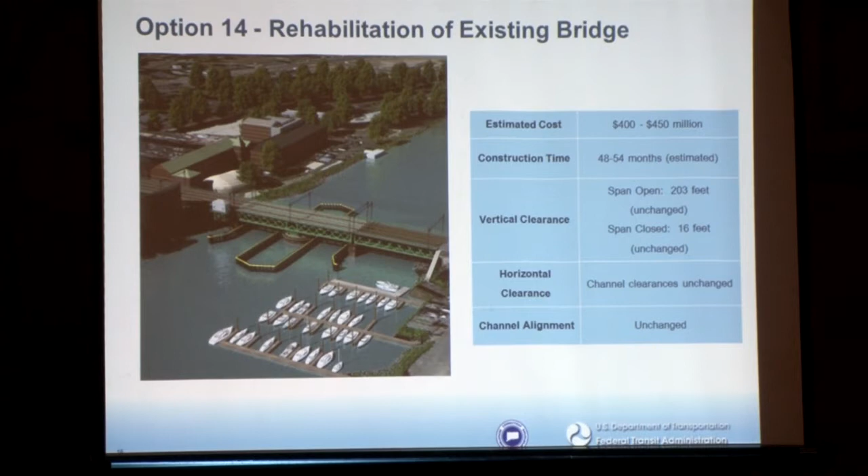In the vertical clearance, from a navigation clearance perspective, there is no change. The swing span that's out there today essentially would remain the swing span under a rehabilitation scenario. So there's no change in navigation clearances, both horizontally and vertically, and no change to the alignment of the channel as it relates to the Stroffolino Bridge.

Part of our study also looked closely at what's happening below the mudline in the waterway. That's a critical element to promoting resiliency as it relates to protection against extreme storm events.

We've looked at traffic impacts - rail traffic, waterway traffic, likewise vehicular traffic and pedestrian traffic over on Water Street - under a construction scenario. All of those elements are very important in how we're evaluating those rehabilitation and replacement needs.

Right-of-way and utility impacts are also evaluated, and then, as I mentioned before, construction staging. What that means is, how does a rehabilitation or a replacement get implemented without compromising rail traffic and waterway traffic? And if it does, how do those impacts get mitigated?

In all these replacement scenarios, the navigation clearances are improved. By that I mean the horizontal clearance of the movable span replacement alternatives improves both horizontally and vertically, particularly vertically when the span is in the closed position.

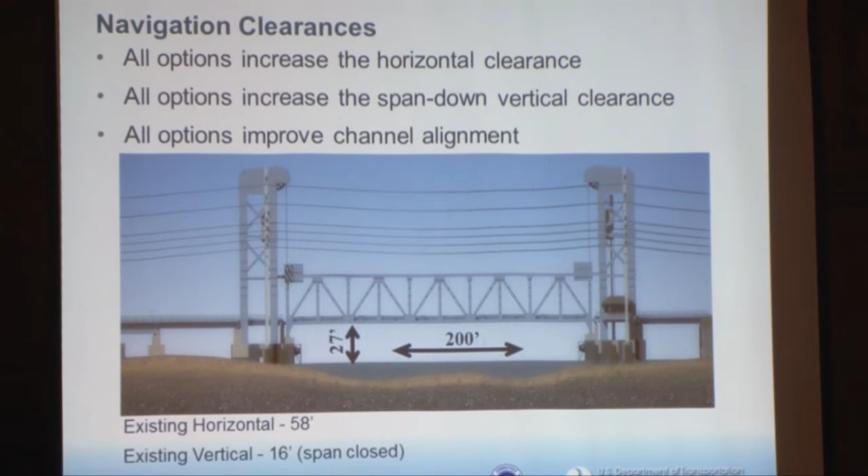Right now the vertical clearance is right around 16 feet. In all scenarios, that number goes up. Likewise, the horizontal clearance improves as well, and that's just by virtue of how the structure would likely get built.

So let's go in here and look at these replacement alternatives. If you're comfortable with the nomenclature of the numbers or the names, feel free to refer to those in any manner that you like. For example, option 2G was one of those options that came out of the matrix.

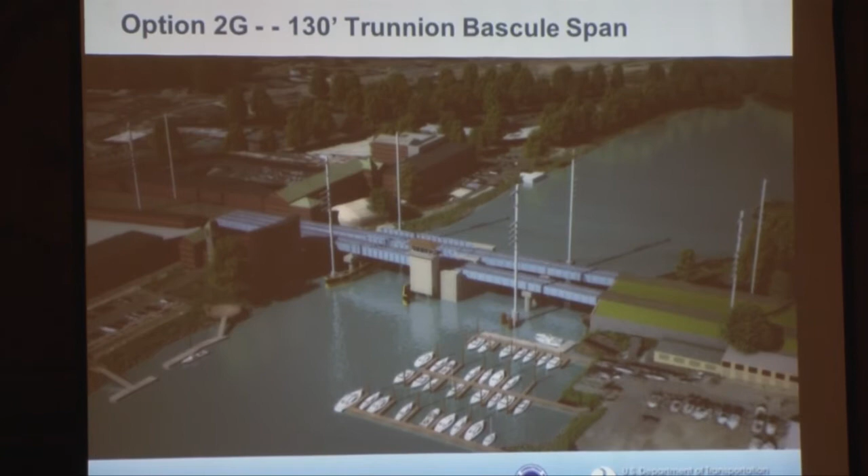What option 2G is, it's a trunnion bascule bridge. All that means is it's a bridge that pivots at one end and rotates upward, as we can see in the next slide. I don't have a pointer, I'll have to go to the screen. It pivots about a point and allows navigation traffic to pass beneath it.

It has a cost range of around $350 to $400 million. Construction schedule, 36 to 42 months. And all of these are conceptual numbers and are being refined, so keep that in mind as well.

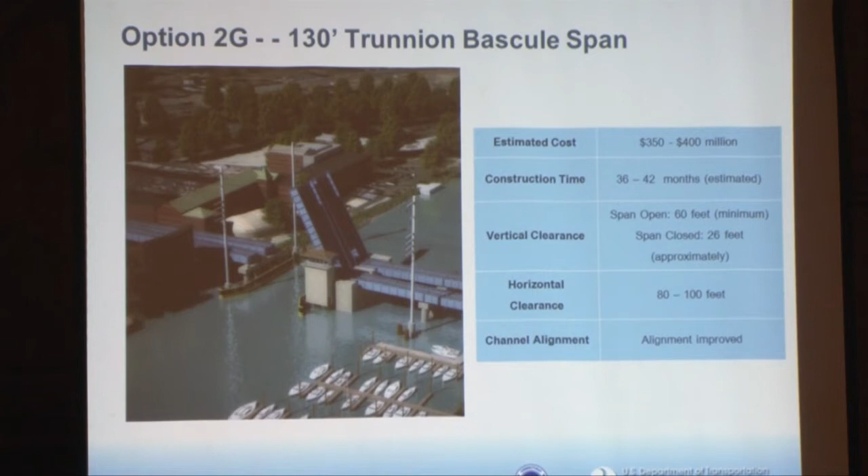The vertical clearance, when the span's open, provides 60 feet minimum. It has an ability to provide about 80 to 100 feet of horizontal clearance. And because of where the new bridge piers would be placed, it does offer a better alignment with the Stroffolino Bridge across the waterway.

As we can see here, just in comparison, you'll see a series of these for all of the different replacement alternatives. On the bottom here we have an elevation view of the existing walk bridge, and above it an elevation view of a potential span arrangement for this structure type, a trunnion bascule. And in the open position, you can see what it looks like, how it pivots about the one end.

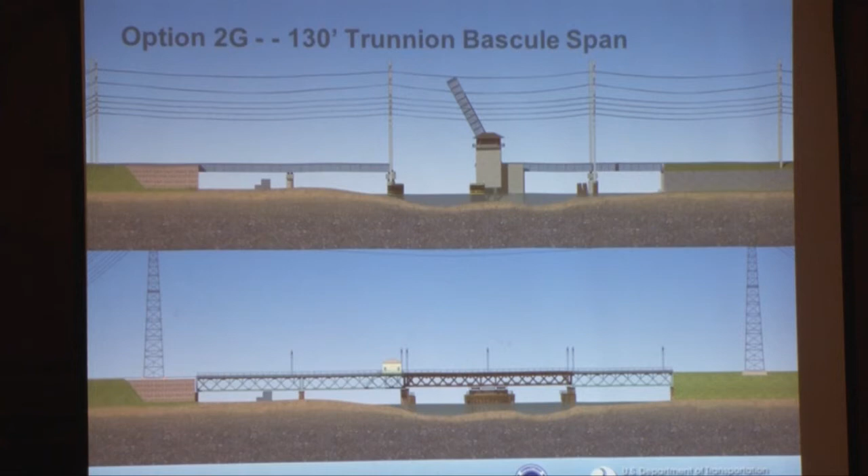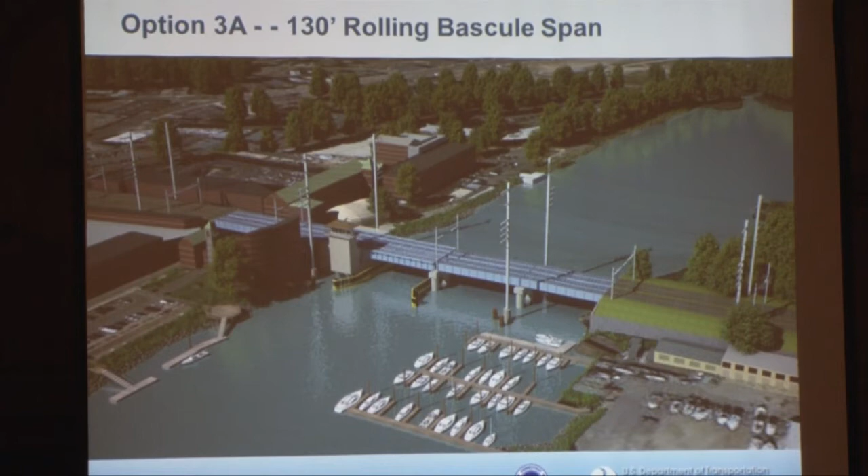This option, 3A, is a lot like the other one, but it's a different movable span type, and to the naked eye you wouldn't know it, because all of the differences are down below. What happens is that in this particular scenario, we've moved that pivot point to the west side of the channel. On option 2G, it was on the east side. In this case, when the span is open, it opens from the other direction.

It provides very similar navigation clearances in the open position and in the down position as well. And just like the other one, because of the greater span length that we have, we get better alignment with the Stroffolino Bridge.

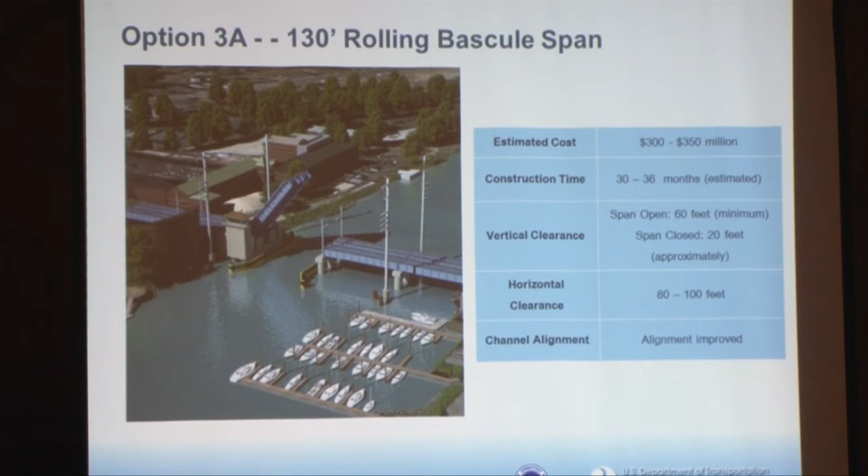Its cost is around $300 to $350 million. Construction schedule about that 3-year timeline, and the navigation clearances again are very similar to that earlier bascule option. Here you can see the difference again with the pivot location over on the west end, and in the open position it may look like that.

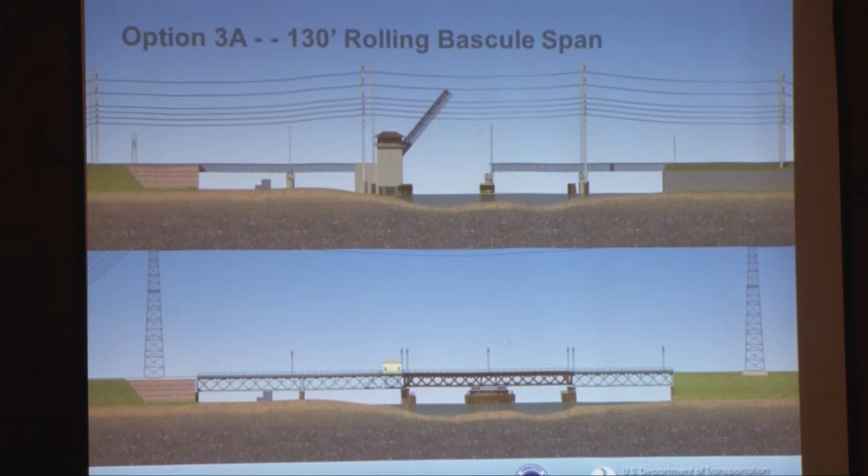Option 4S, this is a rolling bascule truss. On the other two options, it was more of a low-profile superstructure. In this option, we have a truss structure. And what we did was, rather than on the walk bridge, where all the truss is below the railroad tracks, we actually flipped it over, so all the truss is above the railroad tracks.

And what that does is it improves the navigation clearance when the bridge is in the closed position. So what once was 16 feet of vertical clearance could go up to about 27 feet of vertical clearance when you have a structure like this.

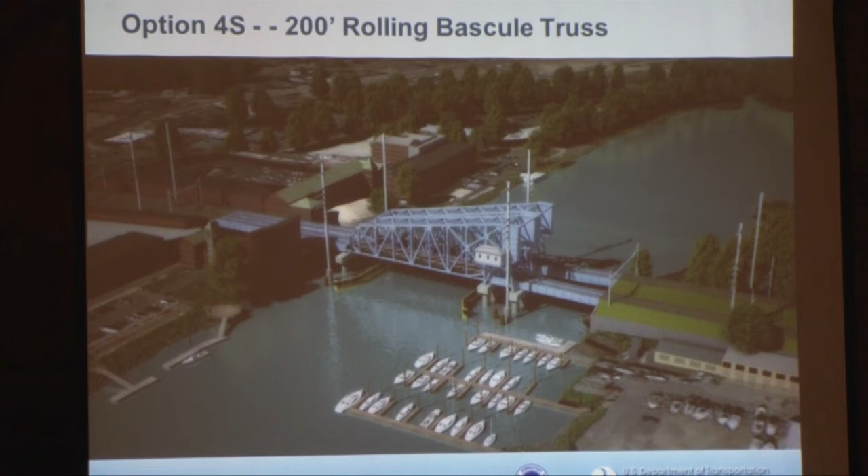Like the other ones that were girder bridges, this truss bridge also pivots about a point and rotates open to allow for navigation to pass beneath it. It has a cost of about $350 to $400 million, again about a 3-year construction timeline. When the span is open, it provides 60 feet of vertical clearance. Horizontal clearance, though, on this particular structure goes up to upwards of 170 feet, so it really opens up the waterway, giving a clear shot between Stroffolino Bridge and the walk bridge.

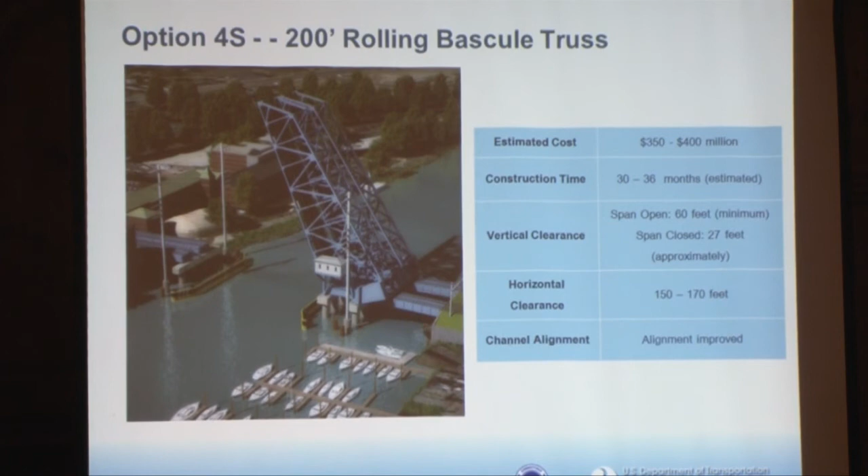And then we looked at two, last images here. Oh, you're okay. Yeah, we can see on this one. Yeah, let's go to the next one. Sorry, I got ahead of myself.

Just a good comparison, to give you a sense of scale on the differences between the two as it relates to the navigation clearances that they provide and the ability to better align the channel.

We also looked at different vertical lift bridges, and vertical lift bridges are highlighted by towers at either end of the movable span that guide that structure upward and downward during its span movements.

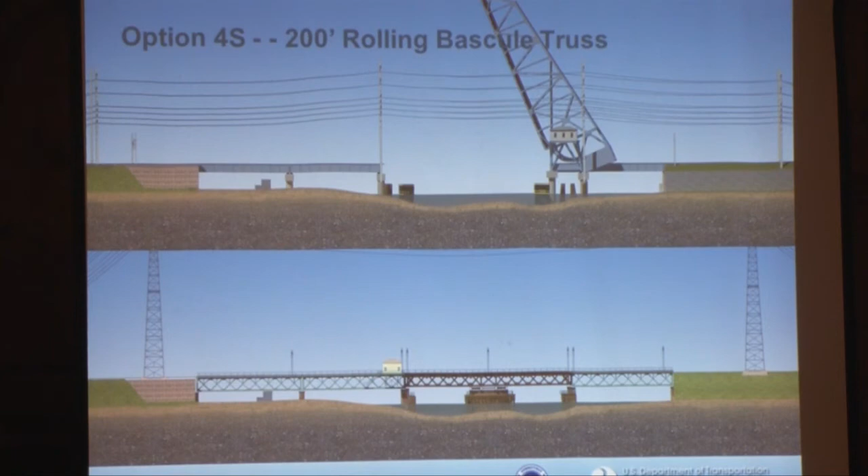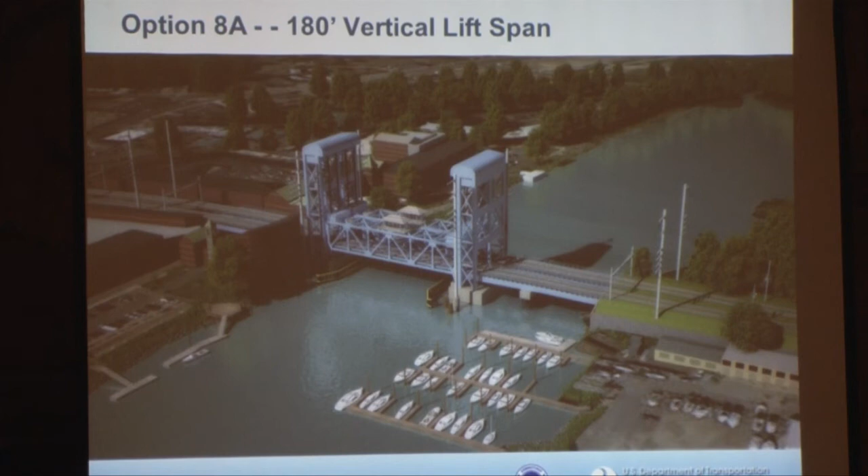On the next slide, we looked at the first vertical lift span that we looked at. It was kind of what I would call a shorter vertical lift span. It's commensurate in span length to the option that you just saw, 4S. But this option takes it to a different movable span type, that vertical lift bridge. And in the open position, it just raises and is guided by both towers at the end.

It has a cost of about $500 to $550 million. Construction time, a little bit more than 3 years. It has navigation clearances again at 60 feet, and so that kind of sets the upper limits of the towers. Horizontally, we can provide about 140 feet maximum, and then again, because the navigation clearance horizontally is increased, we have the ability then to improve that channel alignment.

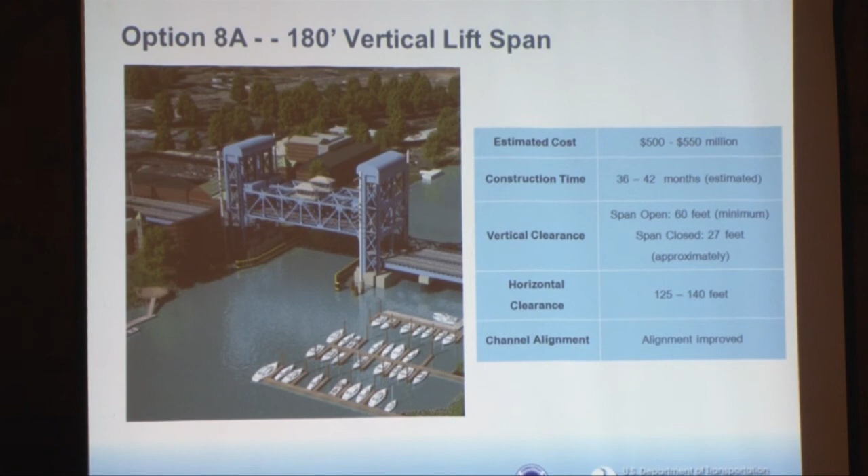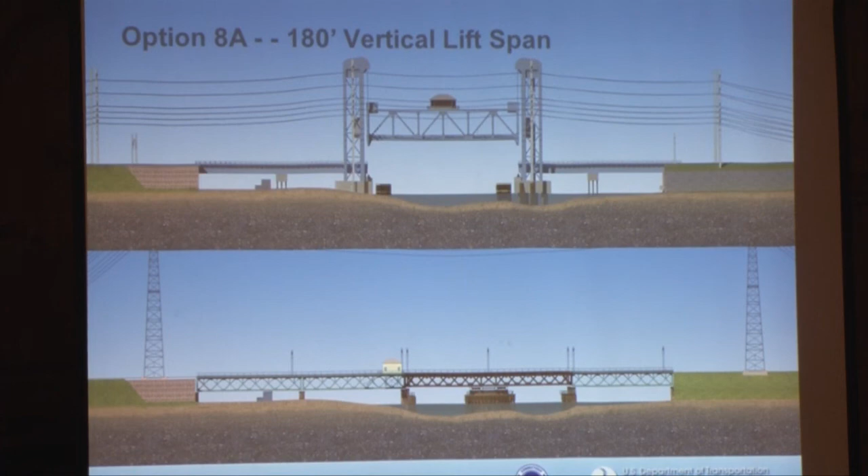And then lastly, when we see this span again in comparison with the walk bridge, you can see the towers at either end, and then when the span is raised to allow for navigation, that 60 feet of vertical clearance. And again, in all of the replacement scenarios, the pivot pier of the swing span would be removed.

And then lastly, we have option 11C, which is a vertical lift span that essentially spans the waterway. Some of you may ask, well, why would you do that? Well, there are reasons why we looked at this scenario. That is about a 250-foot span, and it places the new piers behind the rest piers of the swing span that you'll see here in a second.

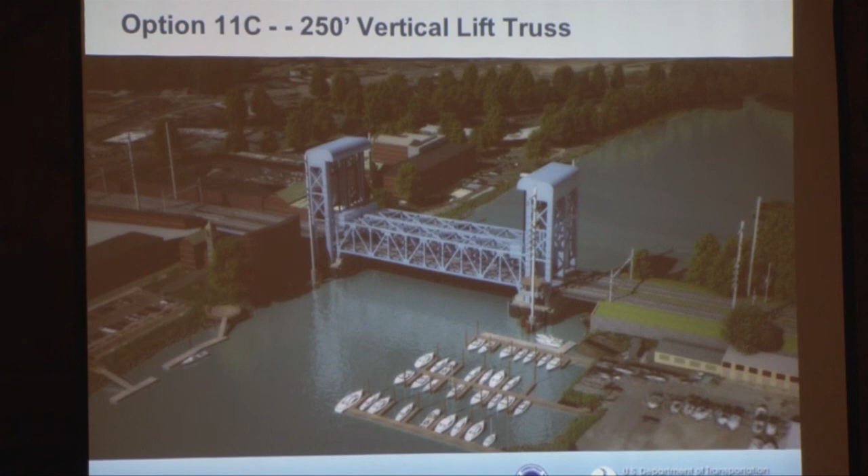So when the span is up, it takes on that configuration. It's a large structure that costs about $550 to $600 million. Construction timeline of upwards of 48 months. Navigation clearance here horizontally goes up to about 200 feet, and again, it really opens up the waterway and provides better alignment with the Stroffolino Bridge.

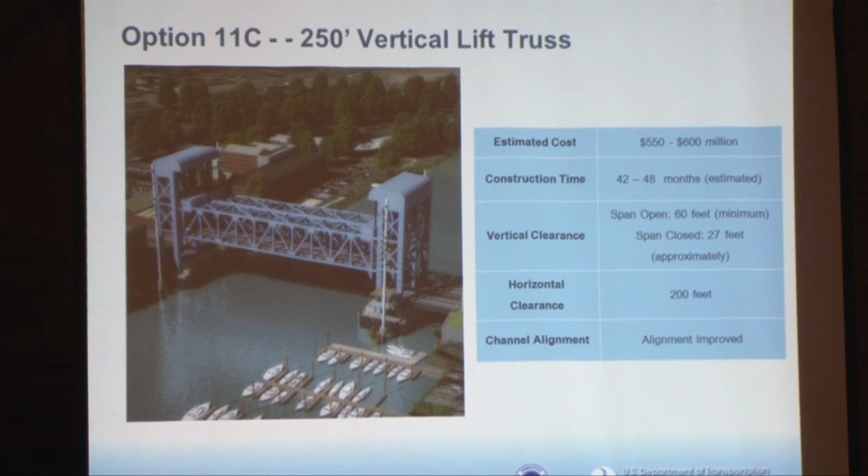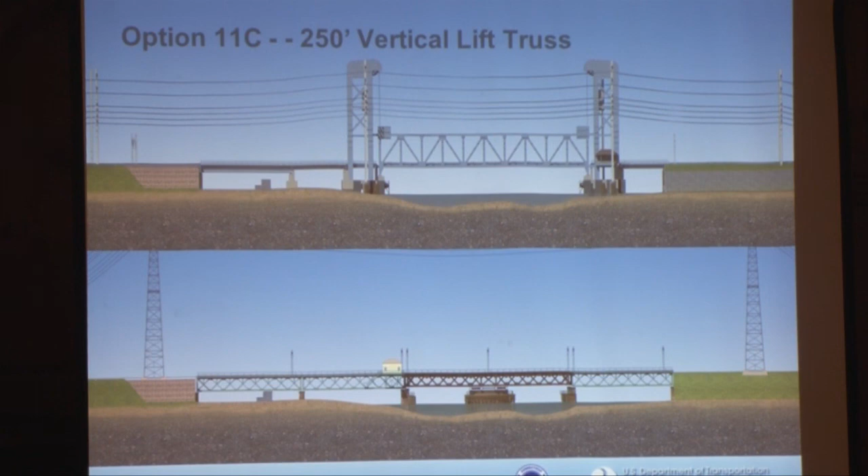And here again, when I talked about on the next image here, the towers for the lift span are on the west side and the east side of the existing swing span. So it completely opens up the waterway.